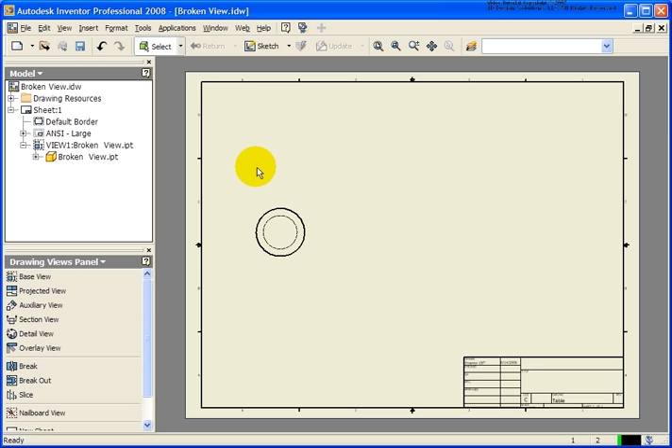In this lesson, we will be covering how to create a broken view. Right now I'm in the file called brokenview.idw, which can be found in your Chapter 5 exercise folder. I'm going to start off by opening up the part file that this drawing view is going to be based on. I'm just going to double click on extrusion 1.

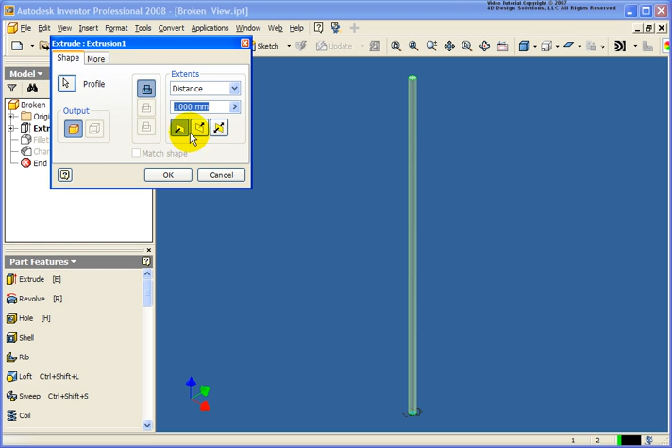And what I want to do is just verify right now that the length of this extrusion is 1,000 millimeters. So I'm just going to exit out of that part. I already have the front view. I'm going to project off a side view. And as you can see, just go ahead and create that. It's very, very large. So I'm just going to pull that view over. And let's zoom back up there just a little bit.

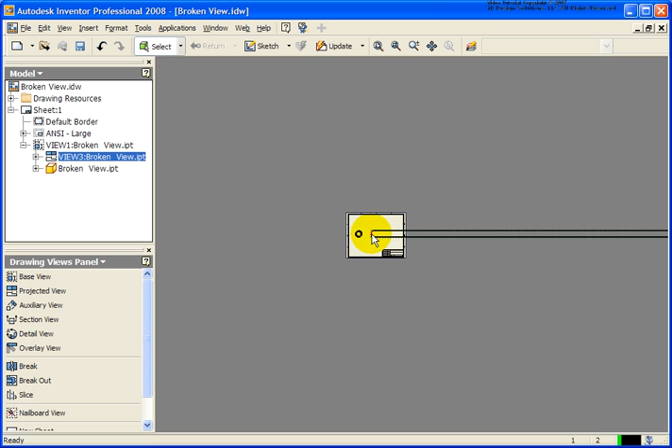Now what a broken view is going to allow me to do is actually take out sections of this view so it can fit in this one drawing. So I'm going to go ahead from the drawing views panel. We're going to click on break. And in the break dialog box, I have two different options. Rectangular style, that would be more for a plate, or in this case structural style is exactly what we need since our part is cylindrical in shape.

For the orientation, should the break be horizontal or vertical? In this case, it's all set for horizontal. Now for the gap size, we can go back and adjust this, but at this point I'm not really sure how it's going to look, so I'm just going to keep the default. And for the gap of 1 millimeter, again, it's just the default. The symbols in this case, if I had 2, how many triangulations we're going to have there. So I'm just going to start off with the defaults here.

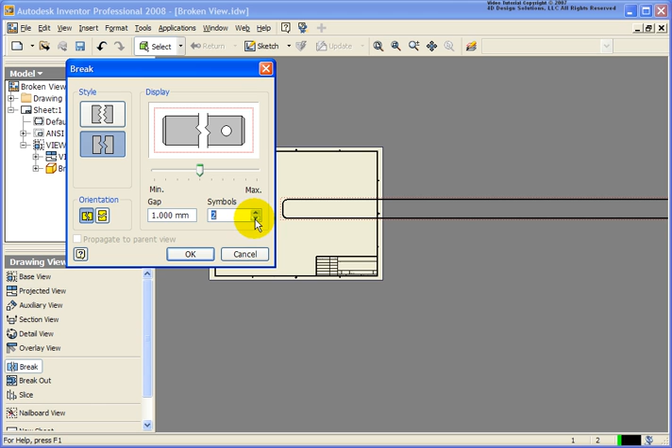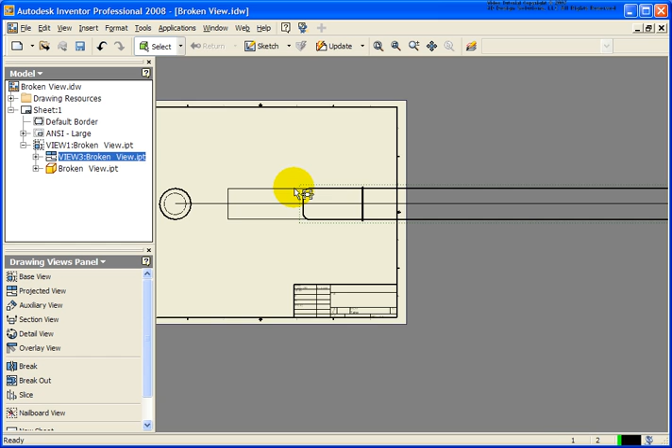So at this point, I'm going to move my cursor into the view. I'm not going to click OK, because if you do, you will exit out of the command. So I'm going to pick a point for the first break. I'm going to move the cursor to the right. And let's zoom back up on that, and let's move that view back over. So you can see we're a little bit tight considering the file that we're in.

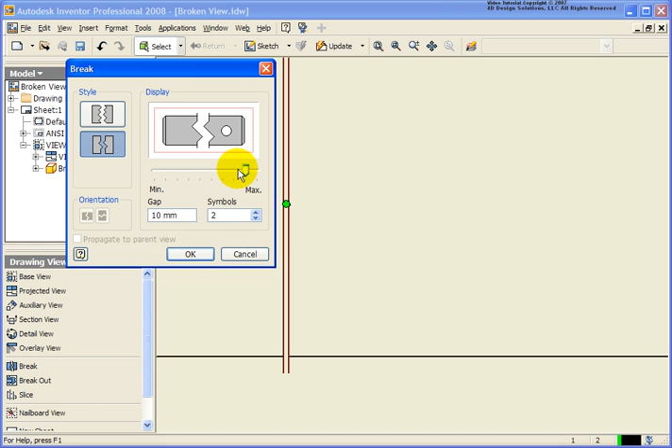So I'm going to right click. I'm going to edit that break. Let's change the gap size to 10. The number of symbols, let's change that up to 2. And for the display, let's change that back up to the maximum. And let's see what that looks like. So again, you can keep on playing with this until you get the exact size that you want. Let's just change the number of symbols back down to 1. I think everything else should look pretty good. I'm going to just zoom back off here.

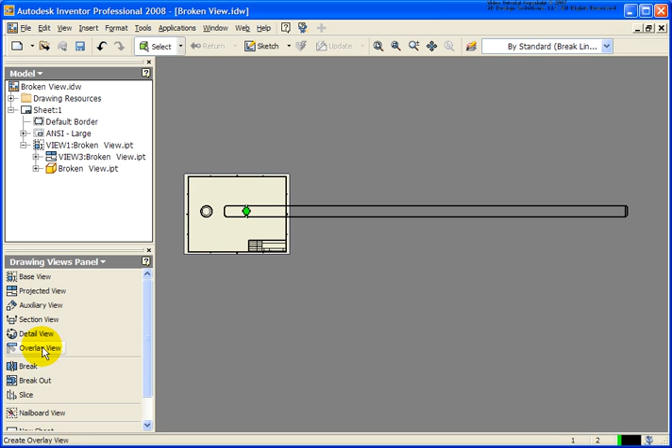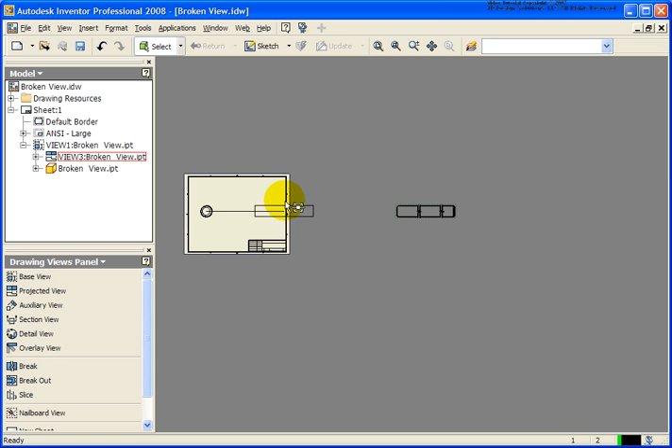Now there's no limit to the number of breaks that we can create, so I'm going to basically repeat the exact same steps. Go ahead and click on break. Select my point. In this case, I'm going to take it right up to the maximum. I'm going to change the gap to 10 because we thought that looked pretty good. I'm going to select a point. And we'll select that second point. Now I'm just going to move the view back into the drawing.

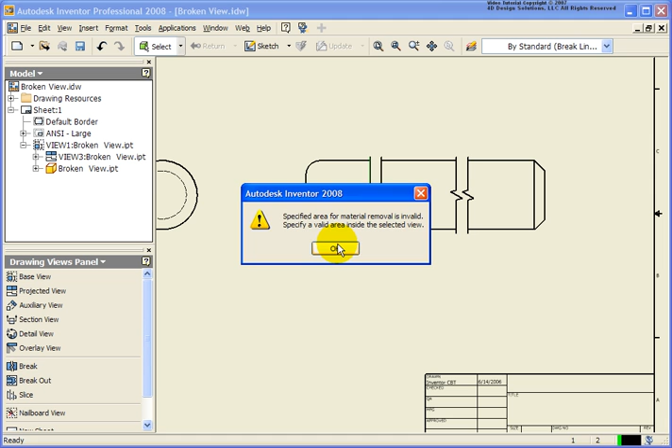Now once I have these breaks, I can grab the extension lines of the break and I can move them. So as you can see, by moving them in towards each other, it'll get smaller. If I take that break line and move it over itself, you see that it won't allow that, so that's okay. Slowly get larger, if you will. So you can go back and adjust that shape.

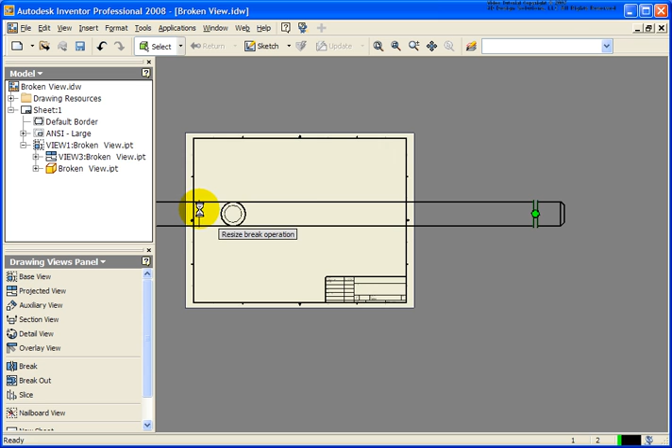Ultimately, let's say in this case I really only need 1 break. So let's go ahead and delete that. Just right click, delete. And let's grab the left extension line. Move it back over. And you can keep on adjusting it till you get the exact size that you want. So in this case, that looks pretty good.

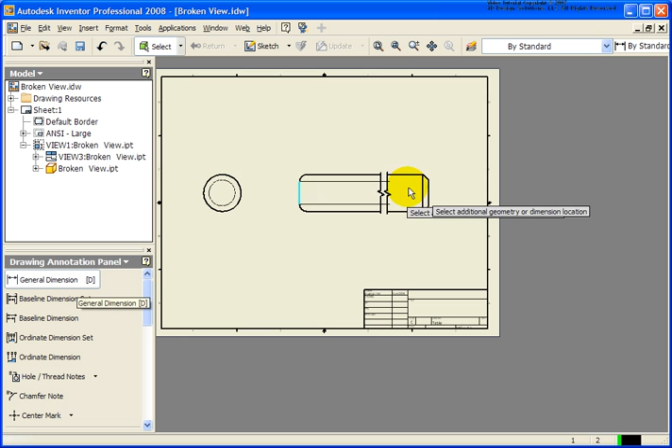I'm going to change the panel to the annotation panel. And all I want to do in this case is validate where we're at with the length. So let's click on the general dimension tool. I'm going to select my 2 outside edges. Place the line. And you'll notice the dimension shows 1000, and I have the ANSI break symbol since I'm using the ANSI standard.